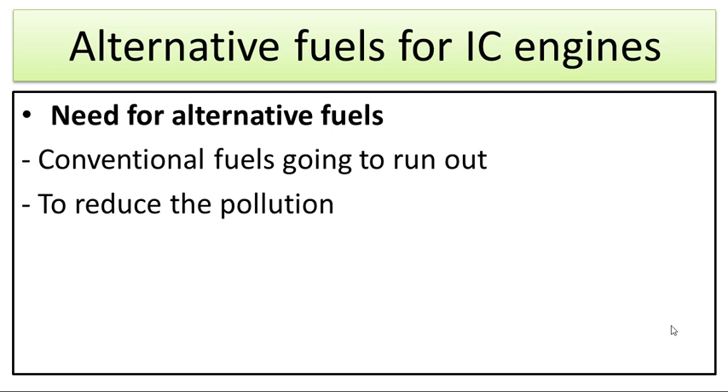As you know, the pollutants that come out from the petrol and diesel engine like CO, CO2, HC, NOx, these pollutants are not only harmful to environment, but they are harmful to human health as well. Hence it is necessary to search for some fuel which will have less or no pollution compared to petrol and diesel. Third one is to become more energy independent.

As you know, maximum of crude oil required for India is imported from other countries. So we are dependent on other countries for the oil, and it will affect negatively the economy of India. So if it is possible to produce some fuel in India itself, obviously it will make India more energy independent.

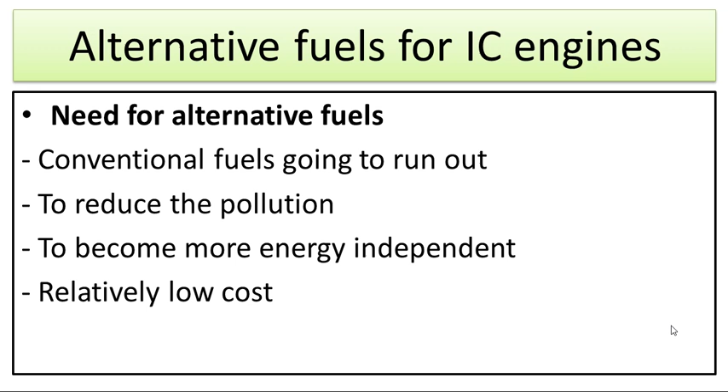And fourth one is relatively low cost. As these fuels can be produced domestically, their cost is comparatively less. It must be less than petrol and diesel. Then what are the possible alternatives? So these are the three categories. First one is called the solid fuels, second one is called the liquid fuels, and third one is called the gaseous fuels.

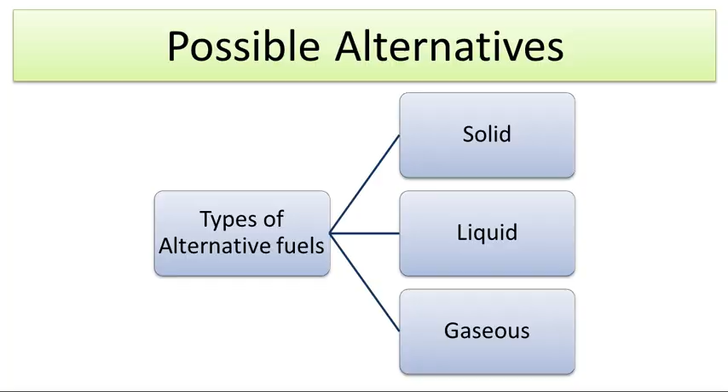So first of all we will discuss about solid fuels. Initially some attempts were made for use of these solid fuels in IC engine. As you know, it is very difficult to use solid fuels in IC engine. There are many other reasons, but one of the most important reasons is abrasiveness of particles of solid fuels. See, initially the particle size used for a fuel of IC engine was 100 micron.

As far as IC engine is concerned, the size of this fuel is much higher. But now we are able to reduce this up to 10 micron. But still some abrasiveness is there, and it definitely will damage the different engine parts. But as I have told you, some earlier attempts were made for use of these solid fuels in IC engine.

For example, in the later half of the 19th century, Rudolf Diesel, who is the inventor of the diesel engine, used coal dust mixed with water as a fuel for his diesel engine. Okay, so this was the attempt made. One interesting story was that during Second World War, when maximum of the liquid fuel available was used by army vehicles, very less or no fuel was available to the civilians.

Hence at that time many civilians tried these solid fuels for their IC engine. So that was the period when maximum of solid fuels was used for IC engine. But after that, as more crude oil was available, we shifted mostly from solid to liquid fuels, and hence nowadays this solid fuel is almost obsolete.

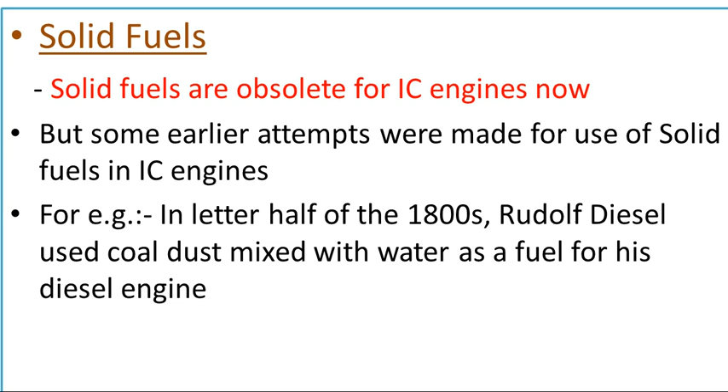Then the second one is liquid fuels. These fuels are most promising fuels, and hence they are mostly preferred for IC engine. There are two reasons behind using these fuels for IC engine. The first one is they are easy to store, and second one is they have reasonably good calorific value. Now this question may come in your mind: what is meant by calorific value?

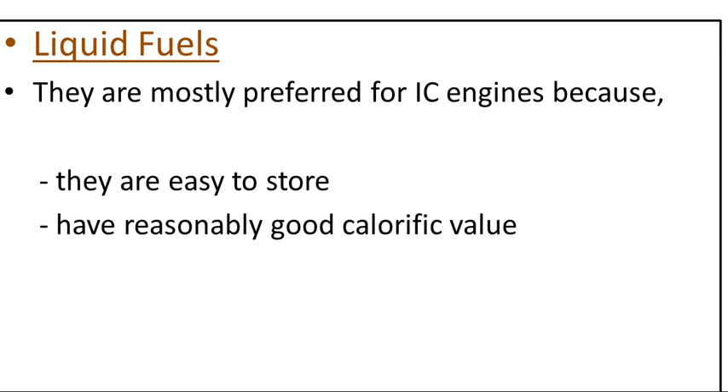See, calorific value means total heat content of that fuel. If total heat content is more, obviously that fuel will liberate more energy during combustion in the combustion chamber, and we will get more power output. Hence we always prefer the fuel of higher calorific value for IC engine. As liquid fuels have higher calorific value, they are generally preferred for IC engine.

Now among liquid fuels, many are there, okay, but among these the most promising are alcohols. There are many alcohols available. You know that in hydrocarbons, if we replace hydrogen by OH group, then it will become alcohol. But mostly two kinds of alcohols are preferred for IC engine, and the reason behind preferring these alcohols is they can be obtained from both natural as well as manufactured sources.

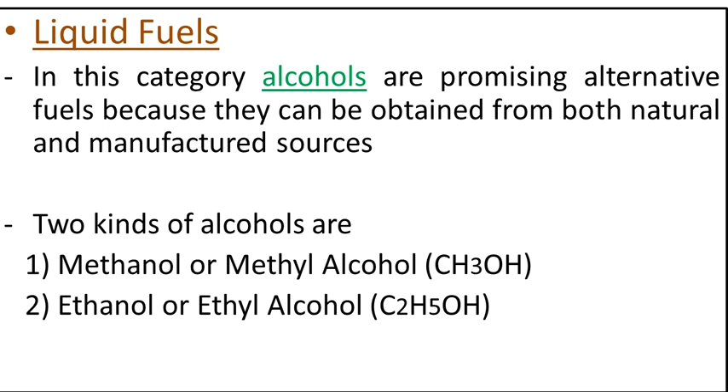Okay, so the first kind of alcohol that is preferred is called methanol, that is methyl alcohol. Its chemical formula is CH3OH, as you know. And the second is ethanol or ethyl alcohol. Its chemical formula is C2H5OH.

Now the first one is methanol or methyl alcohol, that is CH3OH. The octane number of methanol is greater than petrol. So with methanol, 20% greater output than a petrol engine can be obtained due to higher compression ratio. Now what is meant by that? The octane number of methanol is greater than petrol. What is meant by octane number?

Octane number defines the anti-knock characteristic. If the octane number is higher, then the anti-knock characteristic of that fuel is higher. The scale for octane number is from 0 to 100. If the octane number is near to 100, that fuel has good anti-knock characteristic. Knocking tendency of that fuel is less. For a petrol engine, we always prefer a fuel with higher octane number, so that knocking is less.

As methanol has an octane number more than petrol, you may say that the knocking tendency of the engine which uses methanol is less compared to a petrol engine, and hence you can go for a higher compression ratio. As you know, as the compression ratio of a petrol engine increases, its knocking tendency increases due to the limitation in octane number. But when you are using methanol, as its octane number is more, you can go for a higher compression ratio, and knocking tendency will be less.

The thermal efficiency of a petrol engine depends upon the compression ratio. As it is possible to use a higher compression ratio in the case of methanol, thermal efficiency is more, right? And third, as we already have discussed, methanol can be obtained from coal or municipal solid waste, and the mass of methanol consumed is more than petrol due to the lower calorific value of methanol. This is the major disadvantage of alcohol. The calorific value of alcohol is less compared to petrol, and hence we have to use more mass in order to get the same power output as that of petrol.

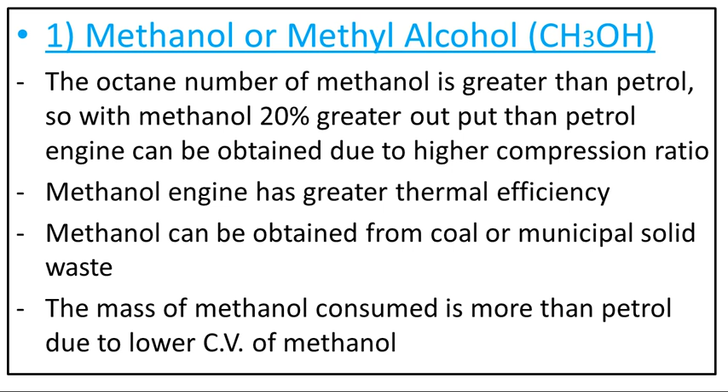Second, as its calorific value is less, generally we prefer these alcohols in blended form, right? So what is meant by blend? For example, an M10 blend means 10% of methanol by volume and 90% of gasoline. Other blends are also available. In some cases blends up to M85 were also used, where 85% methanol and 15% gasoline is used. Methanol can be used in some dual fuel engines as well, but methanol is not a good fuel for CI engines.

The major reason is its octane number. The octane number of methanol is higher. Higher octane number fuels are always preferred for SI engines, and they are not good fuels for CI engines, and hence methanol is not a good fuel for CI engines. But if a small amount of diesel oil is used for ignition, it can be used with good result.

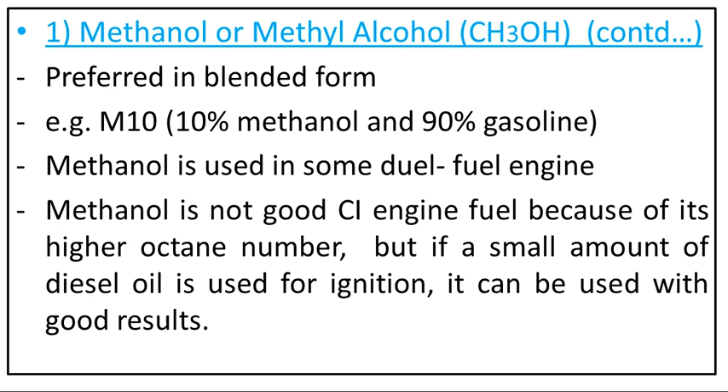Now the second one is ethanol or ethyl alcohol, C2H5OH. The octane number of ethanol, being an alcohol, is also greater than petrol, and hence more thermal efficiency than a petrol engine. This we already have discussed. Then volumetric efficiency is also increased as more mass is entering the combustion chamber, hence we will get more volumetric efficiency in this case.

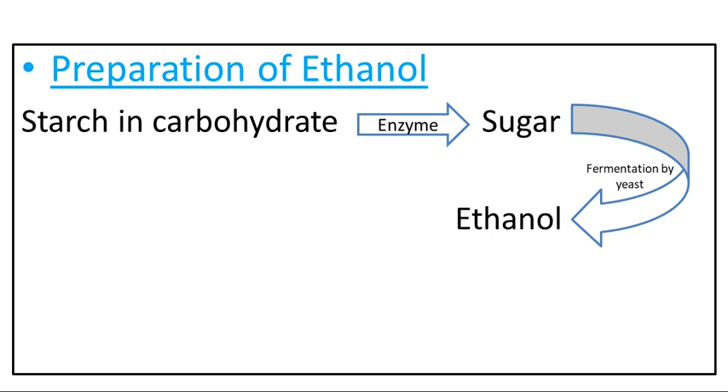And ethanol can be obtained from any feedstock containing carbohydrates such as corn, wheat, sugarcane, potatoes, etc. Right? How is this ethanol prepared? The starch in carbohydrates will form sugar, and the fermentation of this sugar will form the ethanol. So this is the way ethanol is prepared.

Advantages of using alcohol: first, it has a higher octane number. Second, higher pressure and more power, as a higher compression ratio can be used. Third is high latent heat of vaporization. Fourth, it can be obtained from natural as well as manufactured sources. Fifth, overall emissions are less, and sixth is low sulfur content, so sulfur emissions are very much less. They are negligible.

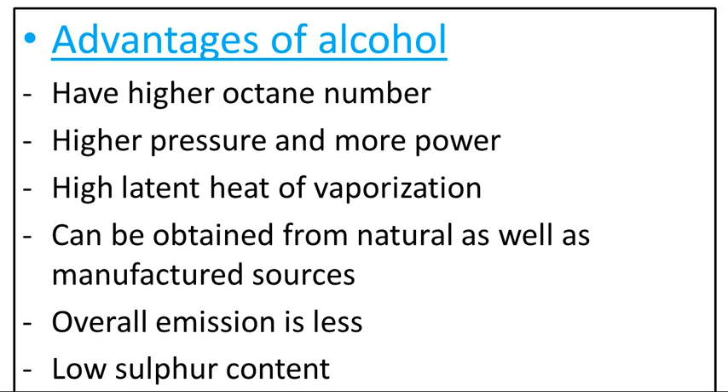The most important disadvantage is its calorific value. It is almost half that of petrol, and hence you need to use almost double the mass of alcohol. More aldehydes in exhaust. It is more corrosive. And due to its lower vapor pressure, poor cold starting and poor ignition characteristics.

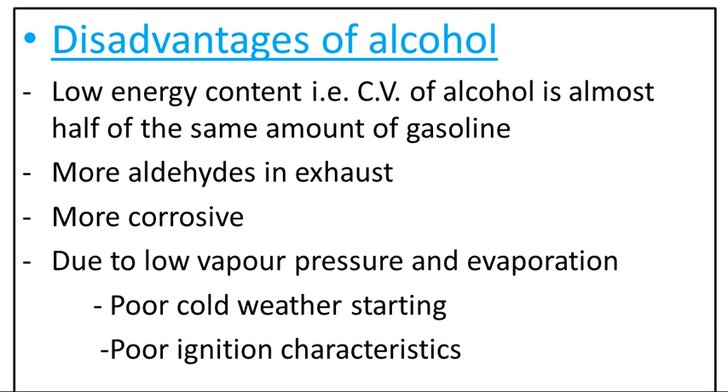Again, alcohols have an almost invisible flame. This is a very dangerous thing when handling the fuels. And there is a possibility of vapor lock in the fuel system; this causes headache and dizziness.

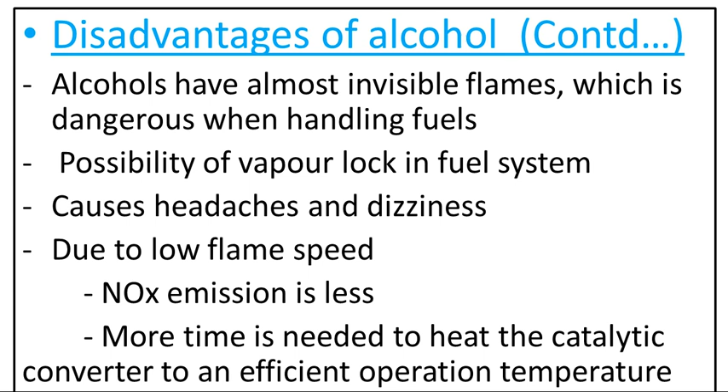And due to low flame speed, compared to gasoline, the flame speed of alcohol is low, and hence NOx emissions are less, because NOx emission is a function of temperature. So as we get lower temperature due to the lower flame speed, NOx emissions are less, but more time is needed to heat the catalytic converter to an efficient operating temperature. Okay, this is again one of the major disadvantages of alcohol.

The next liquid fuel is vegetable oils. These vegetable oils may be WVO or SVO. Now what is meant by WVO? This is waste vegetable oil. And what is SVO? This is straight vegetable oil, or you may say PPO, meaning pure plant oil. So these are the two kinds of vegetable oils.

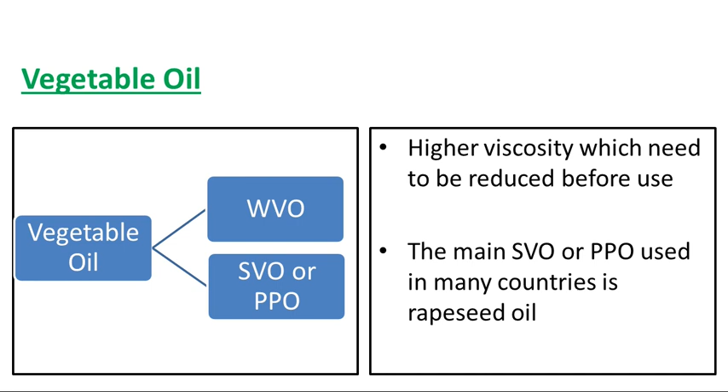Direct use of vegetable oil is very difficult because their viscosity is very high, and hence in order to use this vegetable oil in an engine, it is necessary to reduce this viscosity. Rapeseed oil is one vegetable oil which was used, and which we are still using in many countries. But the use of vegetable oil in India is still limited.

Then biodiesel. Nowadays, many researchers are doing research on the use of biodiesel in diesel engines. What is meant by biodiesel? First, biodiesel is diesel prepared from oil. As you know, the oil may be edible or non-edible. Edible oil means oil that we can eat, and non-edible means oil that we can't eat. For example, edible oil like sunflower oil, non-edible oil like jatropha, like karanja.

In a country like India, it makes no sense to use edible oil for an engine, because this oil is not available enough to eat. Then how can you use it for a vehicle or engine? Hence many researchers have tried to prepare biodiesel from non-edible oil sources, like jatropha or karanja. So biodiesel is basically a vegetable oil or animal fat based diesel engine fuel consisting of long chain alkyl esters.

As its viscosity and density are higher than diesel, we generally prefer biodiesel in blended form. Now you know the meaning of blend. B20 refers to 20% biodiesel plus 80% diesel. So you may have B5, B10, B20 up to B100, which means 100% biodiesel. Many researchers found that up to B20 biodiesel can be used in a diesel engine without any modification.

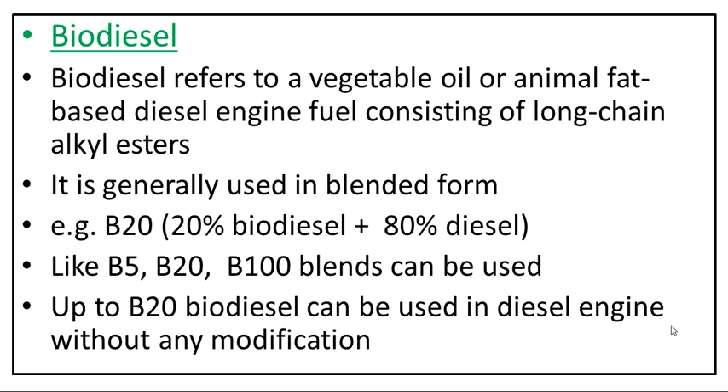Now the next is preparation of biodiesel. How is it prepared? These are the fatty acids, as I told you, that is, mainly glycerides. These glycerides are allowed to react with alcohols in presence of a catalyst. The main catalyst used is KOH, or NaOH may be used, but mostly KOH is preferred, and the reaction gives you esters and glycerol.

Then these esters, if you see, also have a double bond. That is why their viscosity is more. Hence, instead of using them directly, you can use them in a blended form. So this is how biodiesel can be prepared.

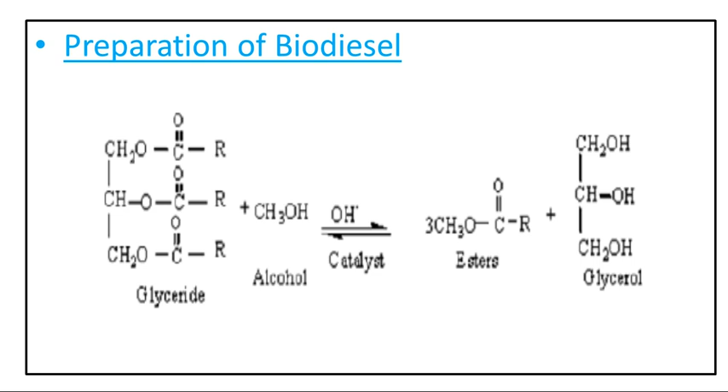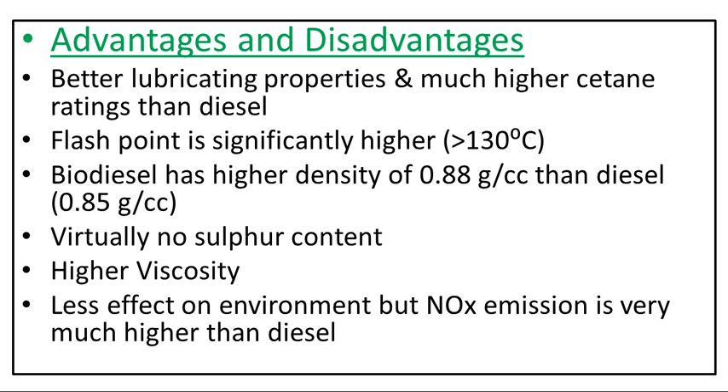Virtually no sulfur content; this is an advantage. Higher viscosity is a disadvantage. Less effect on environment, but NOx emission is much higher than diesel. So in biodiesel up to B20, or for many blends, CO and HC emissions are less, but NOx emissions increase. So these are the disadvantages of using biodiesel.

The next is gaseous fuels. The different types of gaseous fuels and their advantages and disadvantages, all these things we'll discuss in the next video.